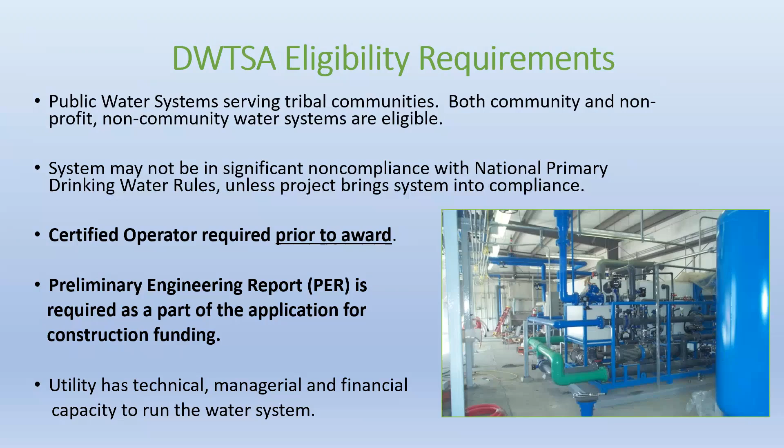And just some general eligibility, the types of projects that we fund: we can rehabilitate and develop sources, we can install and replace transmission lines. A few things that we can't do, compliance monitoring. Oh, sorry, sure.

So what we try to do is fund projects in the planning stages first before we go to construction. So the project will need to be fully scoped and planned before we go to the design phase and then the construction phase.

Okay, and then these are just some of the BIL programs. We have two programs for drinking water set aside emerging contaminants. The first's primary purpose is for emerging contaminants that are in drinking water, and we have an emphasis on PFAS. The second program is a small and disadvantaged communities grant. Basically the eligibilities are the same, except the system has to serve 10,000 individuals or less.

And then the lead service line program - all of these programs I'm discussing today, you can apply through one grant application or one proposal form, and I'll provide that information at the end. The lead service line program is a little bit different. We have a streamlined process for that, and the process is a bit different, but I'll provide some resources on how to do that.

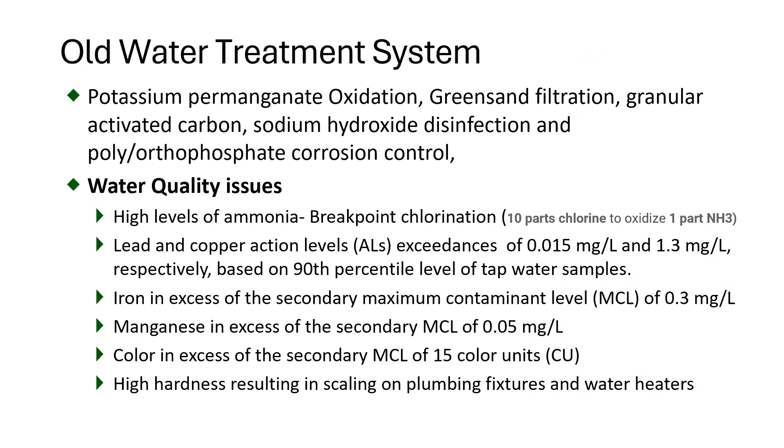A little bit more in depth - going back to the pH, we're looking at a range of 6.3 to 7.2. There's the CO2 again, high ammonia levels, really high iron, manganese, hard water - went through the water quality issues that go with that.

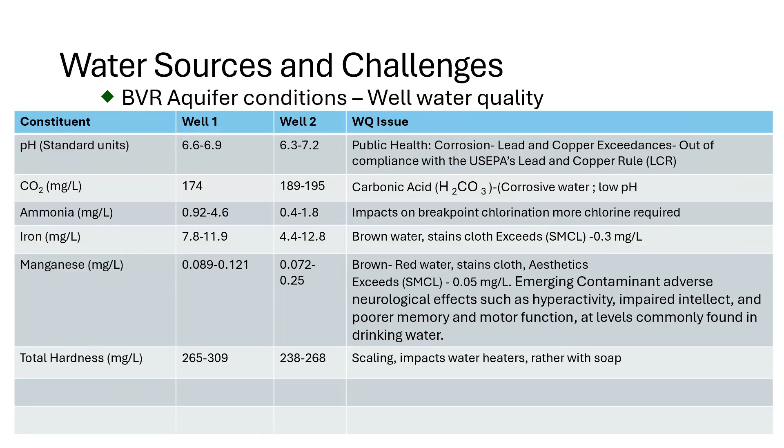So they did a pilot to see exactly what's going on and where we need to be. This is the results from the pilot testing, same numbers I just told you, and now this is the range we're hunting for: pH standard needs to be more than an 8, CO2 needs to be less than 10 milligrams a liter to give us some control over the pH. We want to get ammonia below 0.5, iron below 0.15, manganese 0.02, and total hardness somewhere between 90 and 120.

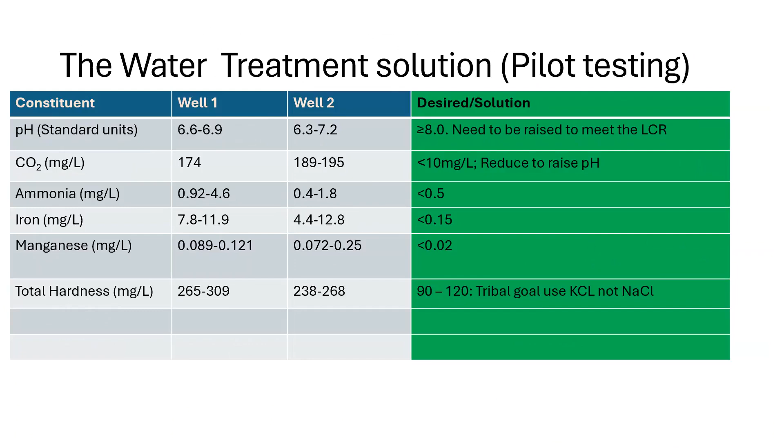More on the pilot: treating the water, they broke it down into 4 stages - reducing ammonia, removing the iron and manganese, softening the water, corrosion control, and then additional storage as well.

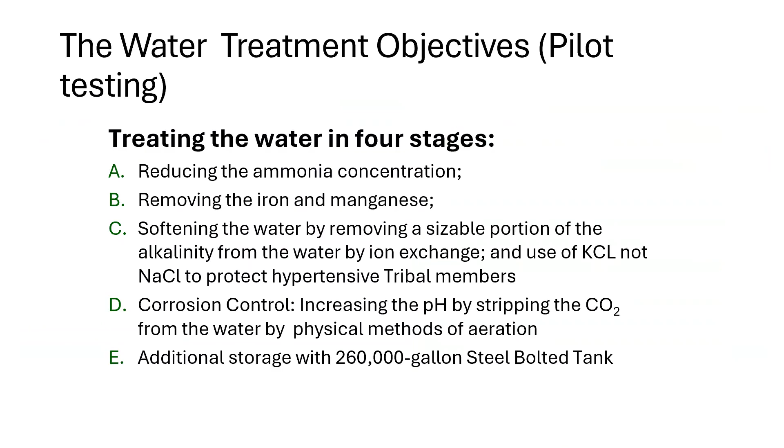So this is just kind of inline the treatment process. The air injection and the ammonia removal is stage 1 - it's a biological ammonia removal. If there's any wastewater people here, it's also a bioreactor.

Moving on to stage 2, which is the iron and manganese removal. There's 2 stages to that - an initial stage and a polish, we'll get more into that in a little bit. Then it goes from the iron and manganese removal to the water softeners, and from the water softeners to the bubbler, where it removes the CO2, and then from the bubblers there's little transfer pumps into the storage tank.

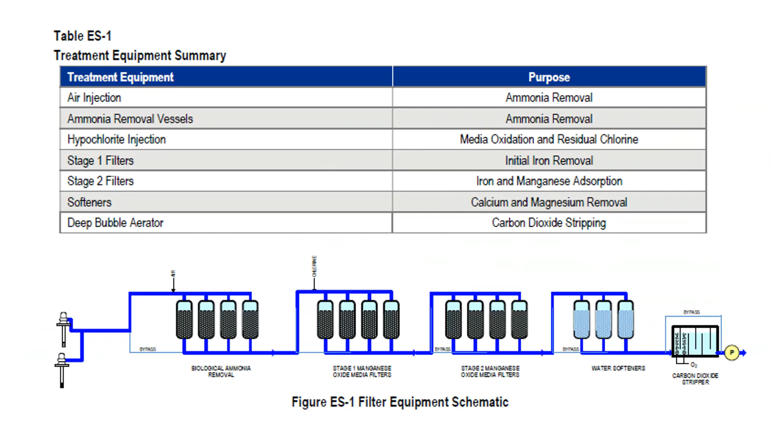Stage 1, reducing ammonia: there is biologically activated carbon - this is actually probably my favorite part of the treatment process. The granular activated carbon in this case is made of coconut shells, compressed charcoal made of coconut shells. In these coconut shells live these little bugs or microbial bacteria that eat the ammonia. So now we're removing ammonia with live organisms as opposed to chemicals, and a lot of chemicals.

So they eat the ammonia. This is going to be a very crude explanation, but it's very to the point - they eat ammonia and fart nitrogen. It off-gasses, good to go.

Okay, so biological filters use dissolved oxygen to feed the microbes, the bacteria, to remove the ammonia. The way it works is water comes up through the well. I did my best to take some pictures, but we have about this much room in between the back of our filter and where the air gets injected into the water.

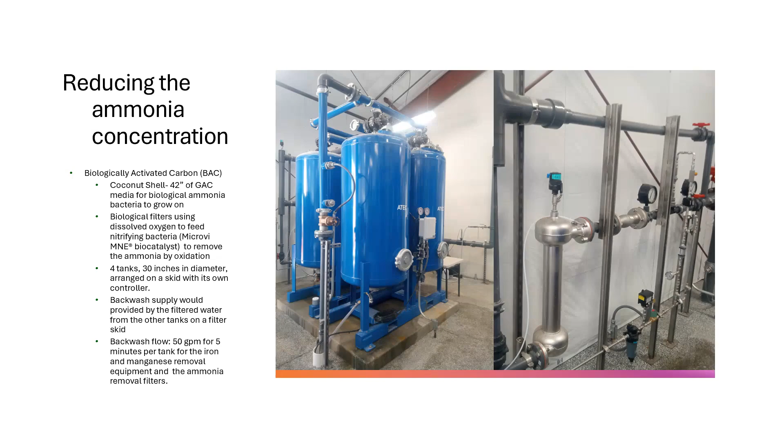So it goes from there to the actual iron and manganese removal process. These guys are filled with a media called Pyrolox. What makes this awesome compared to conventional greensand are two big things. The biggest one, again, you don't need chemical.

Traditionally, you had to use potassium permanganate. It's not fun to work with, it's expensive, it's just kind of no bueno across the board. And the other big thing is it's actually a lighter media, so it takes less water to backwash. As an operator and manager of a water system, that's huge, because now I don't have a chemical bill, and we're not wasting any water, because when this backwashes, the majority of the time, unless you have a retreat process, your backwash water goes to waste.

So it's stage one, everything comes in. So if we have, for example, easy numbers, like 3 parts per million of iron and manganese coming in, we'll have about 1.5 to 1 leaving that goes to the polish. It's the exact same thing.

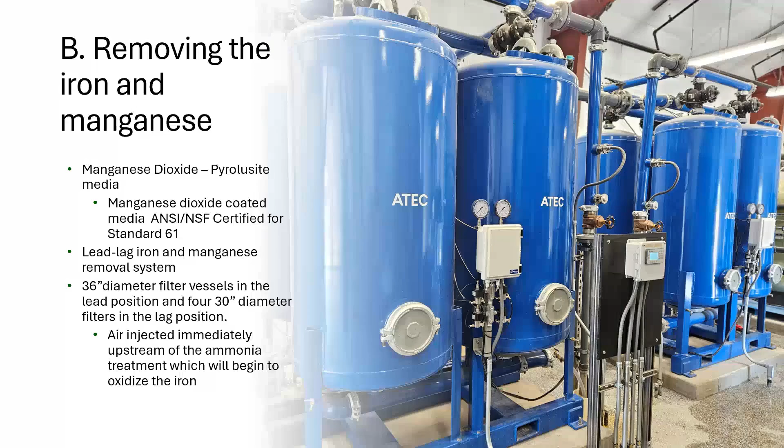Water softening. The most impressive thing about this and the design is not just that it makes soft water. I can't give John G enough credit. This guy ran a marathon, I just got to cross the finish line.

One of the amazing things too is when they designed this plant, they were very health conscious of their community. They have an older community, there's some health issues. So this big black tank over here is the brine solution that regenerates the whole thing.

Typically, if anyone's familiar with water softeners, you use a sodium-based product for everything. This actually uses, sorry, let me peek at my notes here, potassium chloride, thank you. We're already treating with sodium hypochlorite, so we're already putting salt out there. We don't need to put any more salt.

So we had a range of water hardness, ballpark around 300 milligrams per liter coming in. We have about 100 to 110 going out.

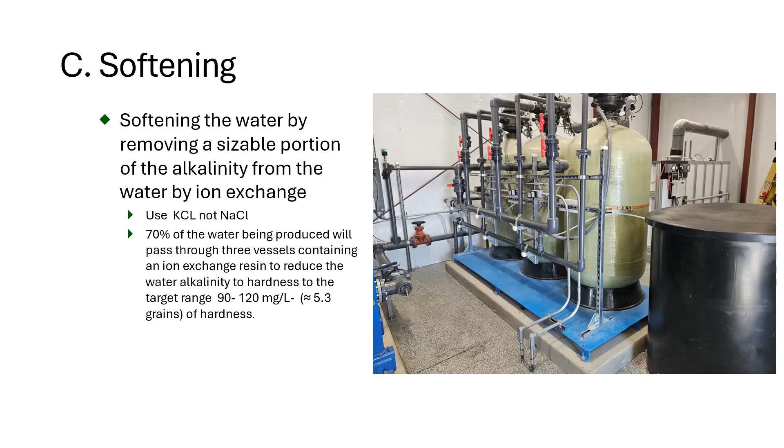This is the bubbler. So this is the workhorse for pH. Like I said, we had roughly anywhere from a 6.5 to 6.8 coming in, and leaving this thing is an 8.2 to an 8.5.

And again, they were using orthophosphate as corrosion control for pH and pipe scaling. And again, it's another chemical that doesn't have to be used. Now we're using air instead of more chemicals.

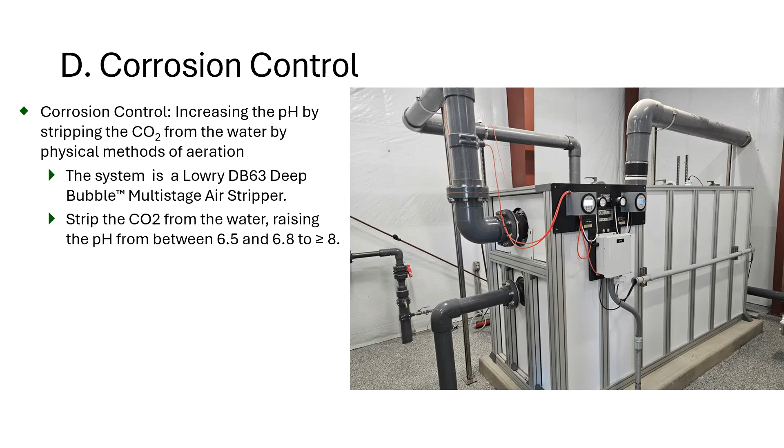The USDA water and wastewater loans and grants were provided to waste disposal security services, low-income rural areas, and residents who are experiencing significant health risks.

The second USDA grant was 3.1 million, part of the Bipartisan Infrastructure Law bill.

The EPA had 2 grants with some help from IHS: the Drinking Water Infrastructure Grant, Tribal Set-Aside Drinking Water Program, and Water Infrastructure Improvements for the Nation. And then the BOR, Bureau of Reclamation, Native American Affairs Bureau of Reclamation was the website.

Indian Health Services pitched in as well. And then, yeah, it came out to a total of a little over 7.2 million.

So here's the raw data. October 10th, we had everything dialed in, up and running. Coming into the plant before anything happens, we were about an 8.8 for iron, 0.093 for manganese, 1 milligram per liter of ammonia, 6.2 on pH, dissolved oxygen at a 6, water hardness at 310, and turbidity at 2.0.

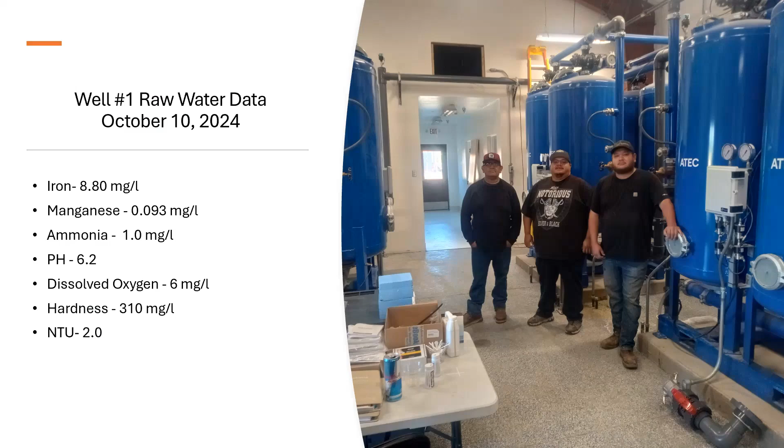Post-treatment data, after it's run through everything: 0 iron, 0 manganese, 0 ammonia, pH is about an 8.5, our chlorine residual going into the tank was a 1.1.

Total water hardness was 110 milligrams per liter, and the turbidity is 0.103, which surpasses any drinking water standard. I think the EPA has a drinking water standard of a 1.

I worked in a surface treatment water plant that treated Clear Lake surface water. They were a non-conventional plant, held to a higher standard of 0.3, which is the toughest standard I have seen for drinking water in terms of turbidity. And we even surpassed that, which I think is pretty neat.

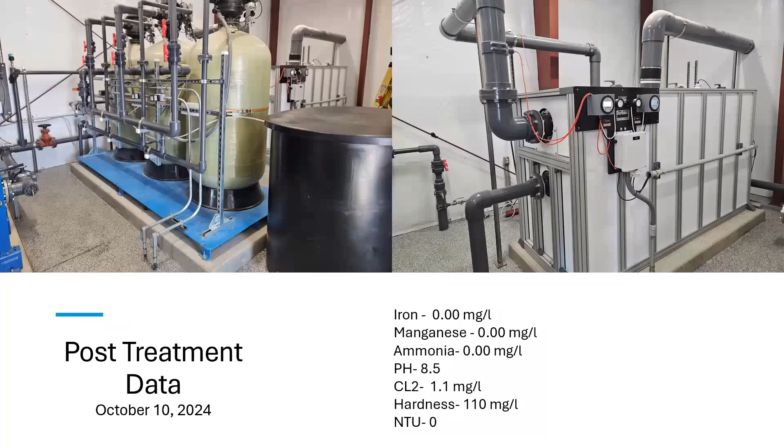And then we also went out after a big flush to see what's going on with our distribution system. 0 iron, 0 manganese, 0 ammonia, hanging on with our pH at 8.5, 0.82 milligrams per liter for chlorine, water hardness at 110.

These are our new booster pumps. These things are awesome. We have a maxed flow, we can crank out 450 gallons a minute if need be, but we usually only run one at a time. They all run off pressure. We keep about 75 PSI in the distribution system.

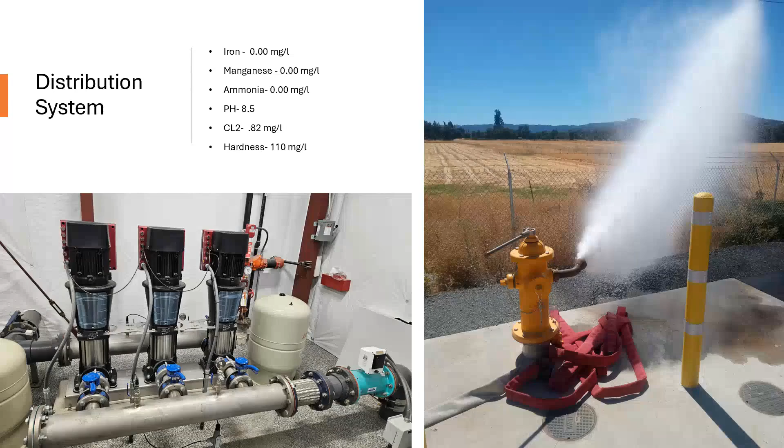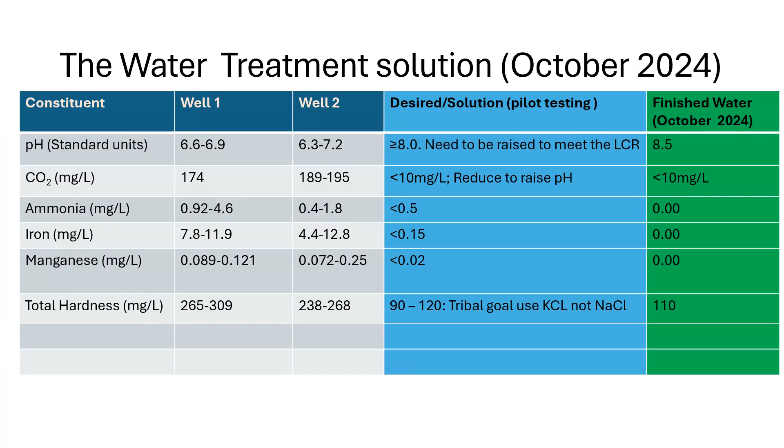Water treatment solutions - this is kind of more of what I just went through. So next up, we're going to keep testing, keep dialing in our treatment process.

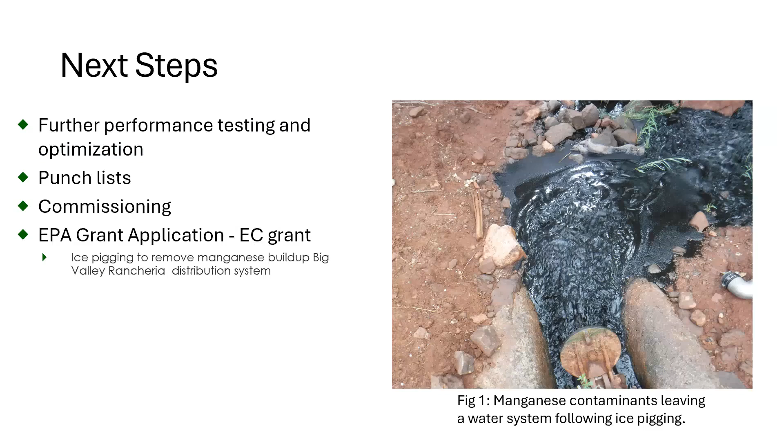That's all I got. Questions?

Yes, ma'am. I don't know if you want to give me a microphone. I'm not great at projecting, but I can try. Thank you. Oh, you might need it back. It might be a silly question.

I'm not a professional in this industry, but I live close to Lake Tahoe, and the universities near me are doing a lot of research about microplastic contamination. Lake Tahoe is the 3rd ranking most contaminated lake out of 38 lakes in the world, even though it's pristine water. And I wonder if in your data collection and in your goals, you also have this type of contaminant included in the goal for reducing it and cleaning the water.

So quick answer, no. We looked at the immediate, what do we know is affecting us, but moving forward, because I know like PFAS and there's other emerging issues in water quality down the road, yes, we will move that way.

And if you don't mind, if we exchange information after this, I'd like to learn more about what you do on your end. Because I would have never guessed Lake Tahoe being, what'd you say, number 3 for most contaminated? And microplastic, that is unreal.

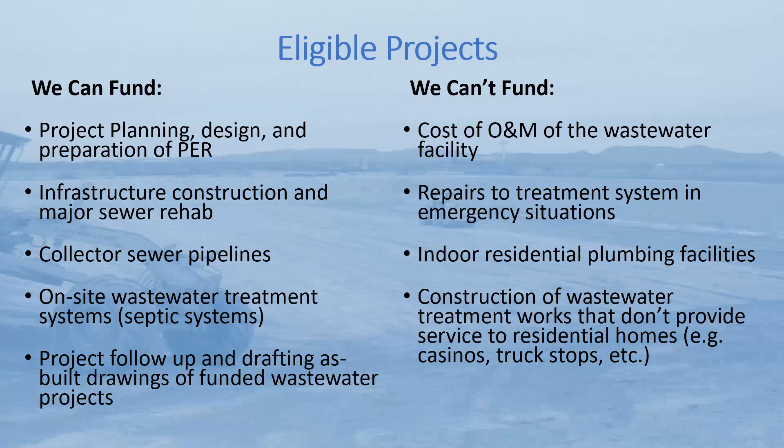A new project or program that we have is the Clean Water Indian Set-Aside Emerging Contaminant Funding. This is a program that was started in 2022. We've just recently gotten access to the funding, and we're currently going through consultation on how to award funding for that program, and we're just finishing that up, and we should have a new solicitation out soon. We're going to be accepting projects on a rolling basis, so whenever you have a project, you can submit to our program, and we can fund those projects. We just need projects that will be addressing a specific emerging contaminant that's generally eligible.

So that basically means the general eligibility is like stormwater projects. We can do wastewater treatment projects, things like that. And we need to see that eventually the project will result in a water quality benefit. So we may do some sampling first and maybe some planning, and then eventually the construction of that would be addressing an emerging contaminant. These projects for the clean water emerging contaminants do not need to be on SDS.

And just some examples of the projects that we can fund. We're probably going to start with a lot of investigation and sampling. There's less data out there for wastewater, on the wastewater side for emerging contaminants, so we're going to start with projects like that.

I just wanted to mention this program really quickly too, because this project is new. We've gone out once with a solicitation and got 2 proposals for this program. One was funded with other funding sources, and the other project is one that John has submitted to us, and he's going to talk a little bit more about that project now.

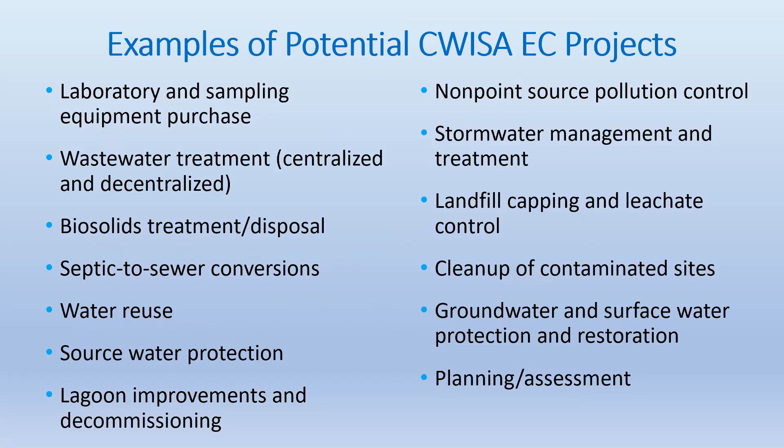Thank you, Nancy. So I'm going to talk quickly about leveraging resources for tribal drinking water and wastewater infrastructure projects, because I participated in the Big Valley project on leveraging resources. So I'm going to talk about some of the other areas, other than EPA, where you could quickly get funding to do your projects.

The first one, Nancy has already talked about - the Water Infrastructure Improvement for the Nation, which is called WIIN. So I'm going to talk about the Clean Water Indian Set Aside, which is CWISA, and that's where we are getting most of the funding for the emerging contaminants. The other funding is the Drinking Water Set Aside. We got some funding on that one too, and I put in the link for it so you people can look at it, but it's already been talked about by Nancy.

The other one I'm going to talk about is the US Department of Agriculture. I'm excited to see USDA staff here - there was great support from them. We went through all the stages, starting from the SEARCH grant, all the way to the funding. So actually, a preliminary engineering report is required for this.

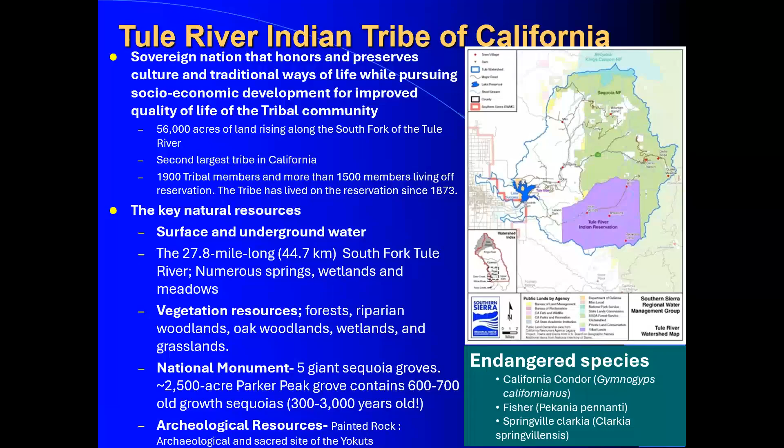So these are several of the natural resources you see there. This is the Sequoia National Forest, and there are quite a number of other resources. It has rivers, it has forest, it has rangelands.

Basically, the tribe has 2 public water systems and 1 wastewater system, which is a membrane bioreactor system, so it produces tertiary treated water. One of the major issues is that in the recent past, in the Tule River, we've started seeing some cyanobacteria blooms, and they think that in the future there could be cyanotoxins in the system. So we want to see how we can take care of that.

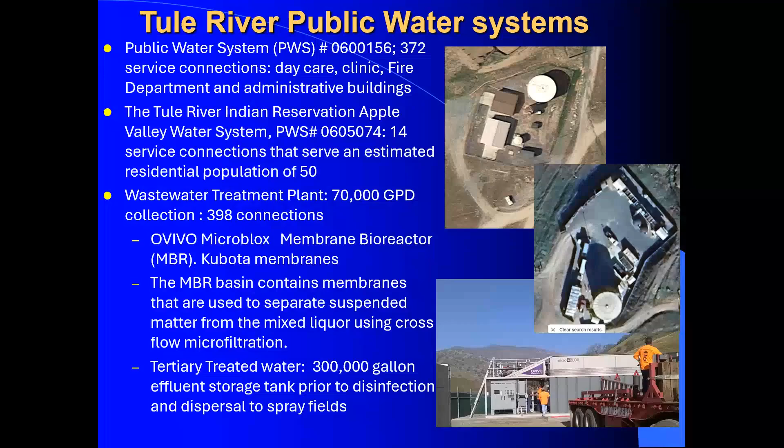The main objective is to look at PFAS in the system, because previous studies have identified PFAS in the well water systems, and there's also harmful algal blooms out of the Tule River. So basically we're going to look at the cyanobacteria blooms, and especially the cyanotoxins, meaning microcystin, nodularin, saxitoxin, and anatoxin-a. We are going to look at all those and PFAS in the Tule River.

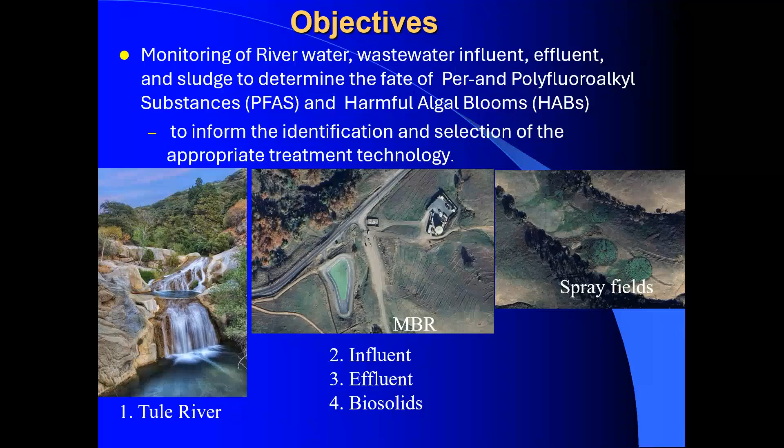We are going to look at the influent, effluent, and the biosolids. This is the plan we are putting together with the EPA. We're going to start with developing QAPP, Quality Assurance Project Plans, and sampling action plans, systematically over a 2-year period, working with contractors who will help us out. In 2 years we should be able to sample monthly for PFAS and cyanobacteria and harmful algal blooms in the system.

And basically, this is how it is. There is quite a bit of detail in how you are supposed to handle it, but these are some of the basic components of the new project that we are working on. So thank you very much.